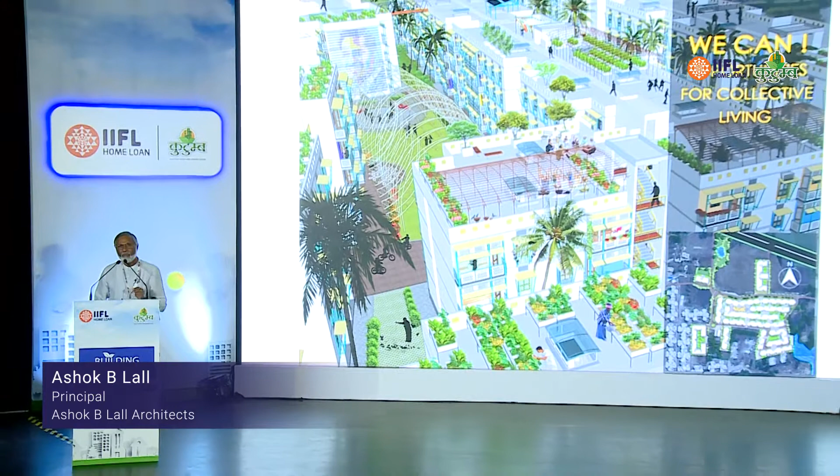So this journey is about the opportunities of collective living, and we're going to look at that and see how, as participants in this work, we all have a role to play towards making a comprehensively better world for living in. We don't only need the basic needs to be fulfilled when we build our homes or when we go to live in a new home. The basic needs being health and sanitation and safety. And of course, the assurances of what I call environmental requirements: water conservation, energy efficiency, and greenery around you.

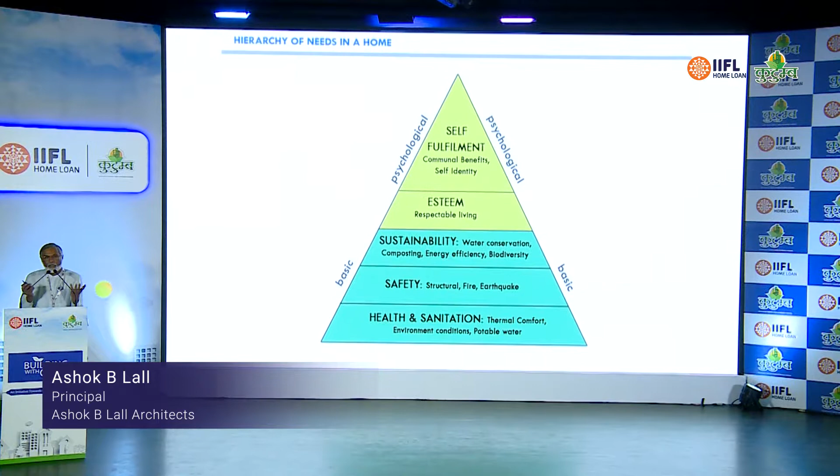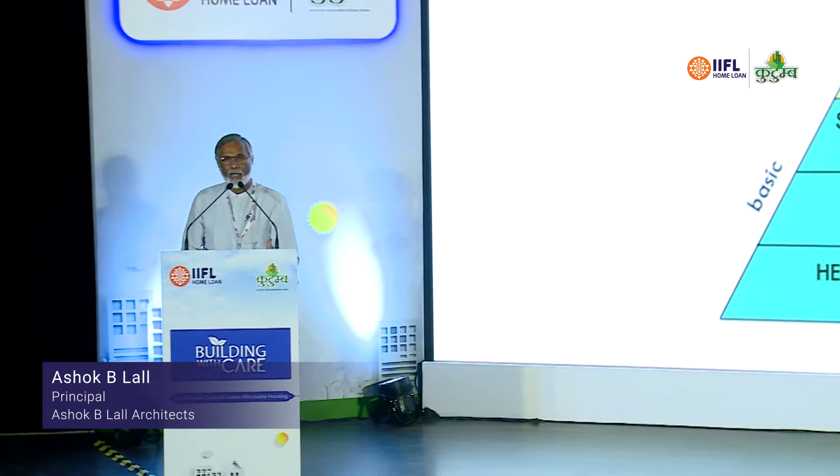This environmental security is an essential need. If in the process of building we don't provide environmental security, then we are compromising our future. And this is a basic need. But we need something more than that. We need, through the process of building and living a new life, a growing self-esteem and eventually self-fulfillment for all members of society. And let us say that providing sound homes for living in is this journey, making this a possibility. And making it a possibility at an affordable price today is our challenge. This is the work that we are really engaged in.

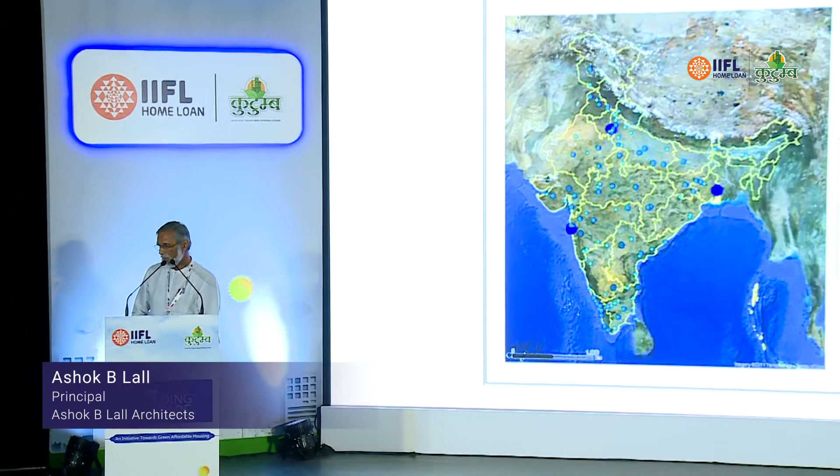Well, we had a glimpse of it in Mona's presentation just now. At the rate we are building in this part of the world, or in China, or in Nigeria, at the rate populations are growing and the rate we are building in cities, we as a nation are going to be a significant contributor to climate change, which is already on its way. So we cannot run away from this responsibility. And most of this is happening in our cities, dotted across the entire subcontinent, as you can see here. And these cities continue to grow. They become bigger and bigger. And the bigger they become, the greater the environmental footprint human habitation is going to have.

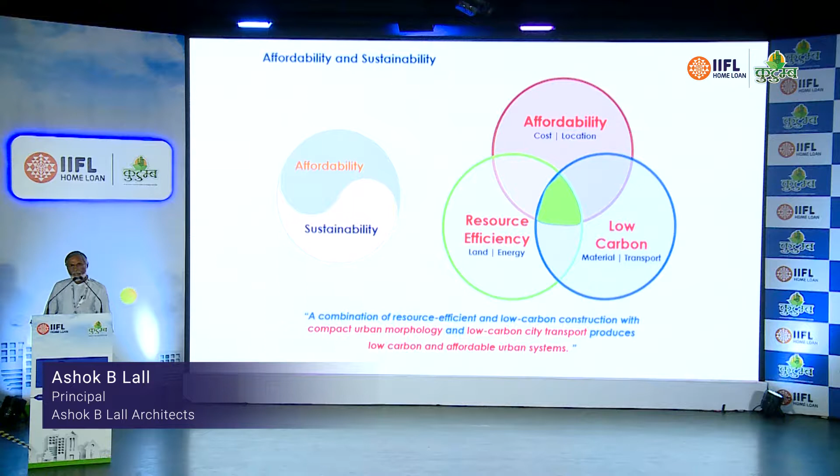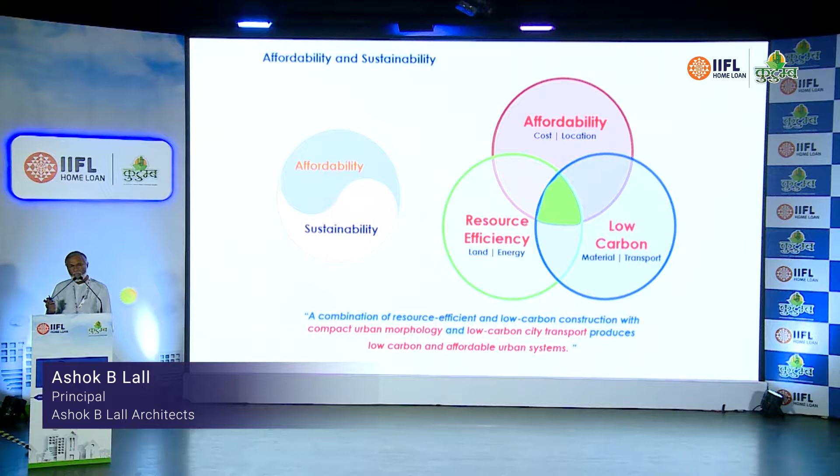I believe that to be affordable is only possible when you are sustainable. And if you are sustainable, you are likely moving towards affordability. I hope this will become clear as we move on. Not only do we have to be efficient in the use of our resources, material resources and financial resources, not only do we have to produce buildings in a manner that produces less carbon emissions, either in their construction or in their operation, we also have to make sure that all of this is done at a price that our buyer with incomes less than 40,000 rupees a month can afford to pay. The green triangle in the middle is the zone of solutions. Just keep this diagram in mind.

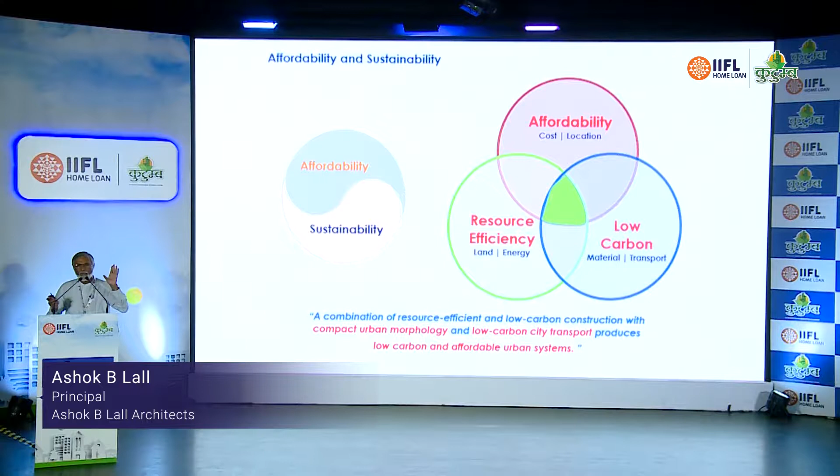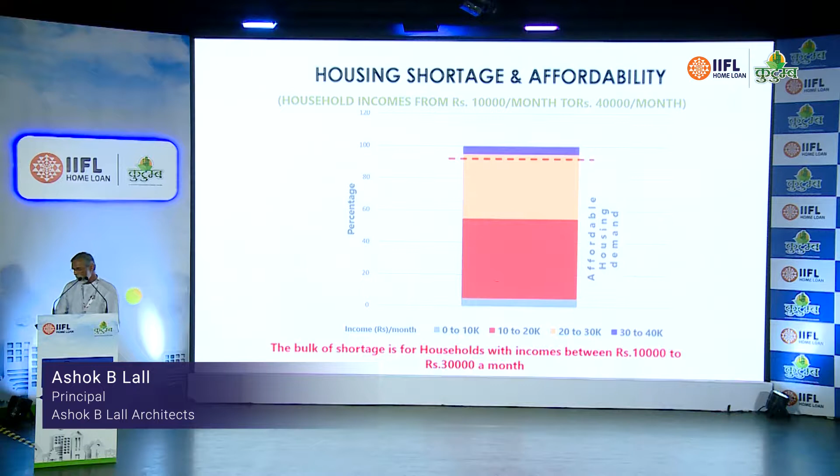Statistics have now made it very clear that most of the housing demand is in the low income sector. Most of it. The bulk of shortage is for households with incomes between 10 and 30,000 rupees a month. And if you scan the landscape of who's providing homes for whom, you'll find that the big developer is not providing homes for this category, not at the moment. Self-build is also not going to do enough for it in the cities. It is the medium and small developer in all the second, third and fourth tier cities, including the peripheries of the large cities, that is going to play the central role in overcoming this challenge. You are in the center of the growth of the nation. That's the point I really want to make.

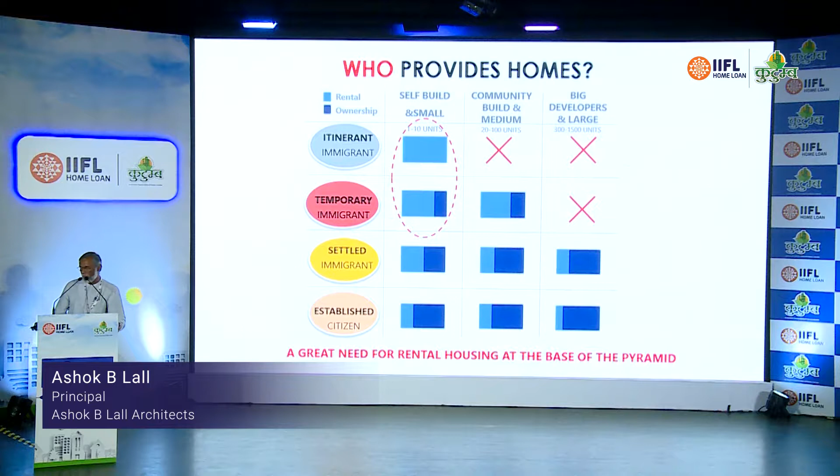Something else that's happening in cities, and it's a subject for Mr. Suresh since he's over here. They say land is short, and so you have to go taller and taller. But we all know, it's common sense. As you build taller, you spend more.

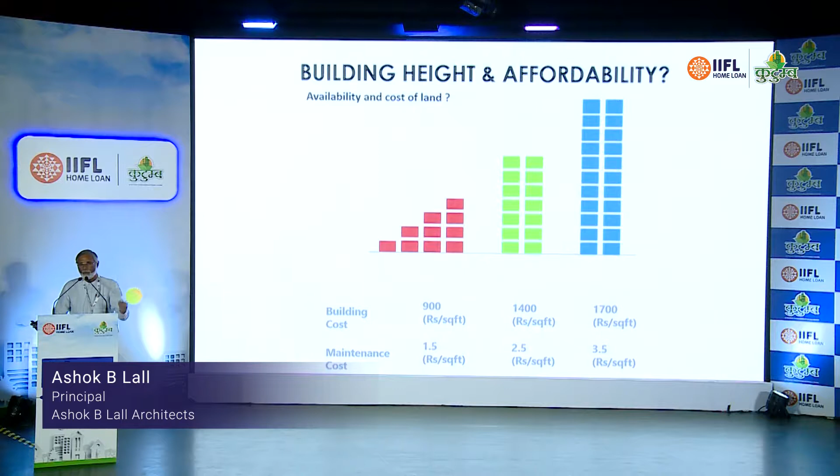As you live taller, you spend more for living. Your prices, your costs for maintenance of the building and the operation of buildings go up. Lifts, pumps, maintenance, so on and so forth, just become more expensive. So actually, not only is a tall building unaffordable to build, it is unaffordable to live in.

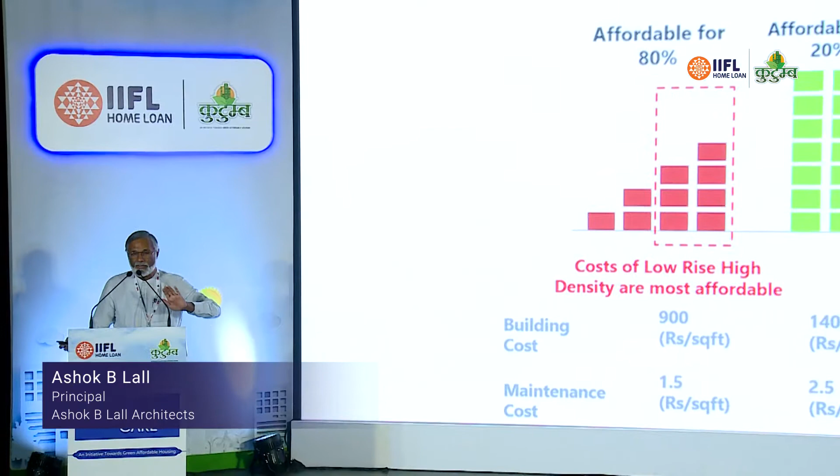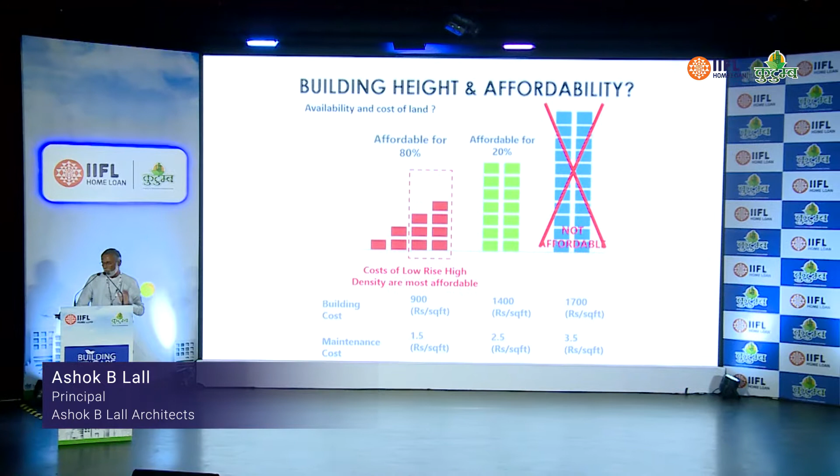And this is something that we have to really convey to our planners and our policymakers. Don't push the cities into a state where only tall buildings are possible, because if you do that, 80% of the population will not be able to afford to live in the cities, and that's no way of living. Most affordable is 3, 4, 5 stories high, and 80% of our citizens can afford it.

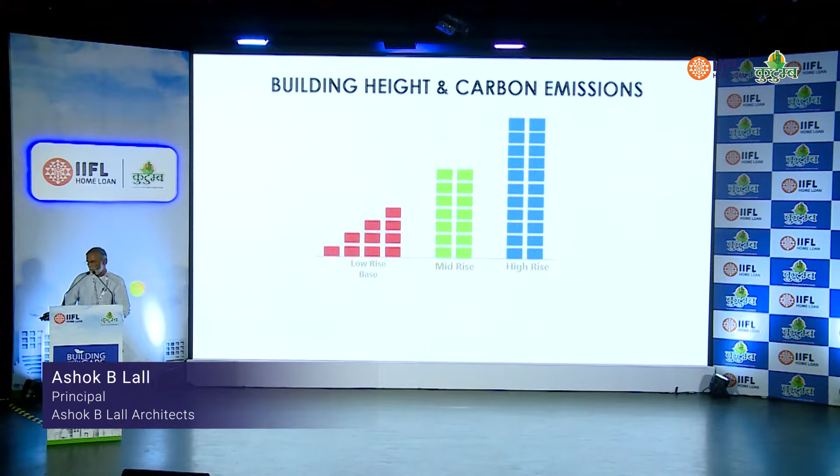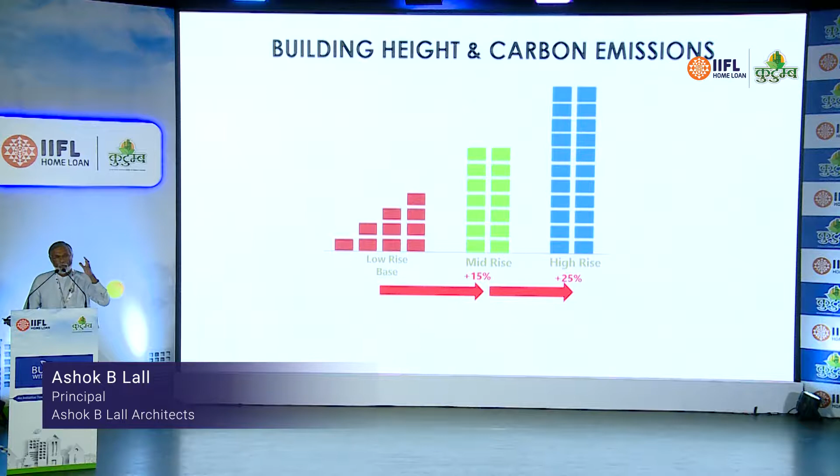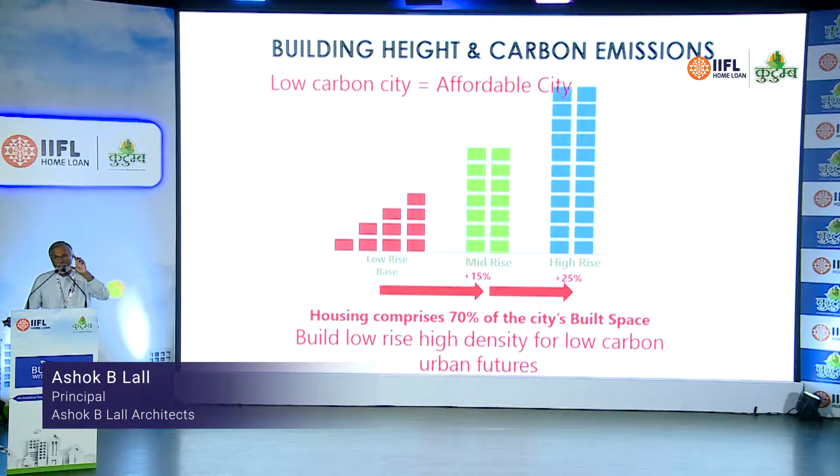We also find that as you build taller, you consume more electricity in the operation of the buildings. As you grow taller, you consume much more steel in the construction of the buildings and other materials that cause a greater emission. They have greater embodied energy and therefore cause much greater emissions of carbon. So, to build low is economical, not only in money terms. To build low is also more environmentally friendly. Sustainable is economical. Sustainable is affordable.

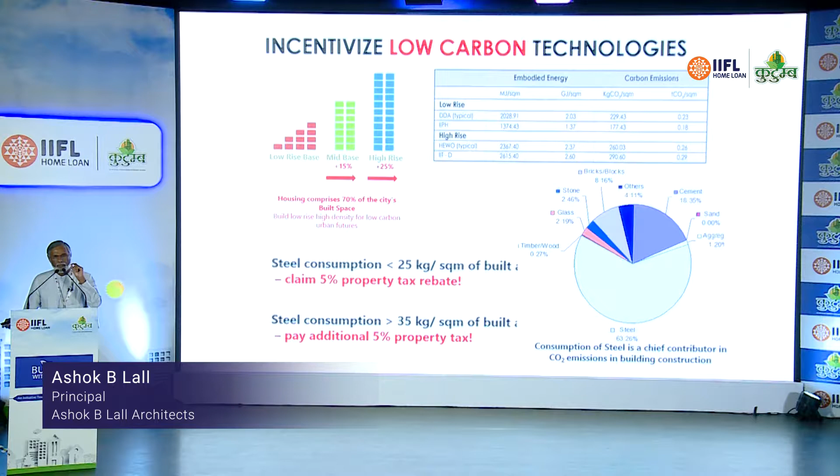We found that approximately 60% of the embodied energy of construction, that is, the energy used in the production of materials for the construction of a building, 50 to 60% is attributable to the consumption of steel in the building.

What we have found, even if you are designing for earthquake zone 3, up to 4 or 5 stories high, you can manage at 25 kilograms of steel per square meter of built space. 25 kilograms, if you do careful design. But what is the norm in industry? 3.5 kg per square foot, they say. If you go taller, it becomes 4. If you go taller still, it becomes 5.

But keep this target in mind. Intelligent structural design and configuration of a building can do much less harm to the environment because you can design it with less steel. 4 to 5 stories high gives you the best results. So that's about embodied energy, very quickly.

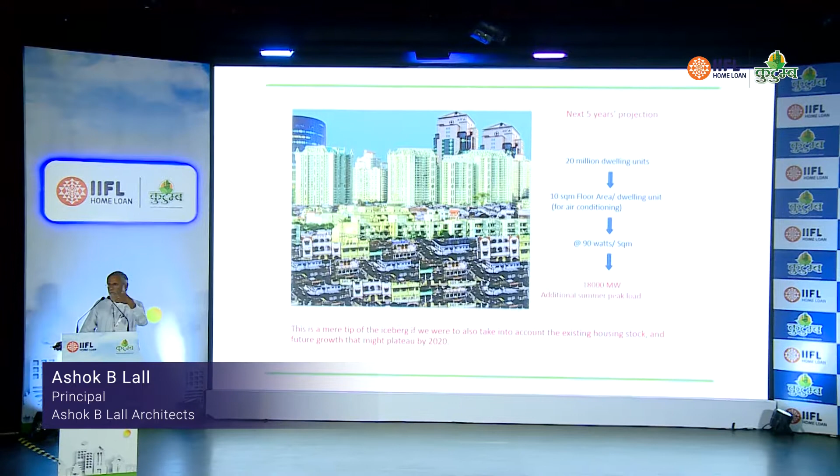Another thing, as we go into looking for better comfort in the home, even if I'm moving into a home today which has no air conditioning, 2 or 3 years down the line, at least one room is going to be air conditioned. Maybe it won't be used all the time, but sometimes it will be used. And then 10 years down the line, maybe more air conditioning will be required. At least I look for air conditioned comfort, if not for air conditioning, right?

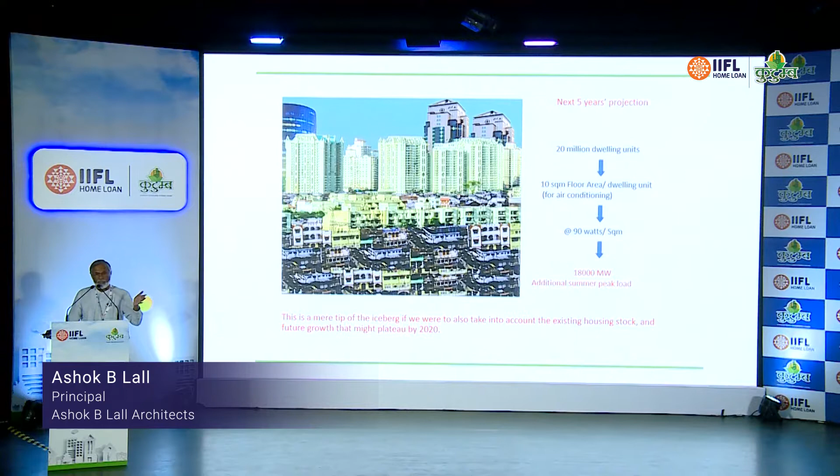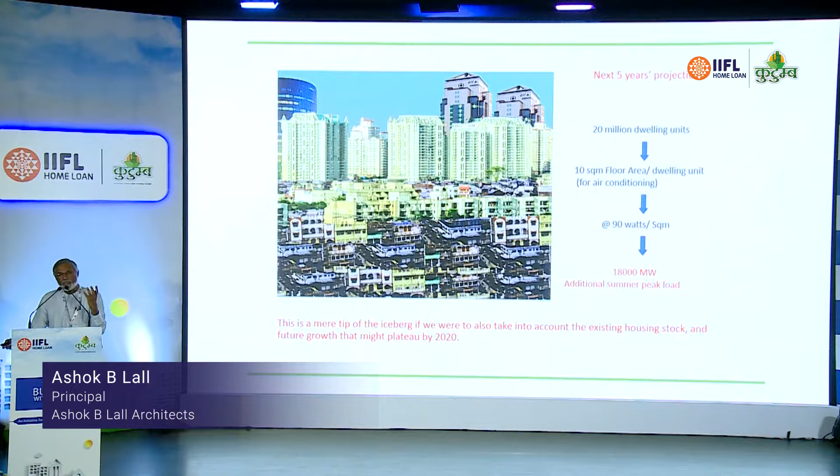So what do we have to do today? Even if air conditioning is not going to be assumed to be a part of the building, we have to design in such a way that the need for air conditioning in the future is reduced. Because if you don't do that, and as you continue to build at such an enormous rate, you'll find that you're going to ask for so much energy just to meet the air conditioning demand of our urban living.

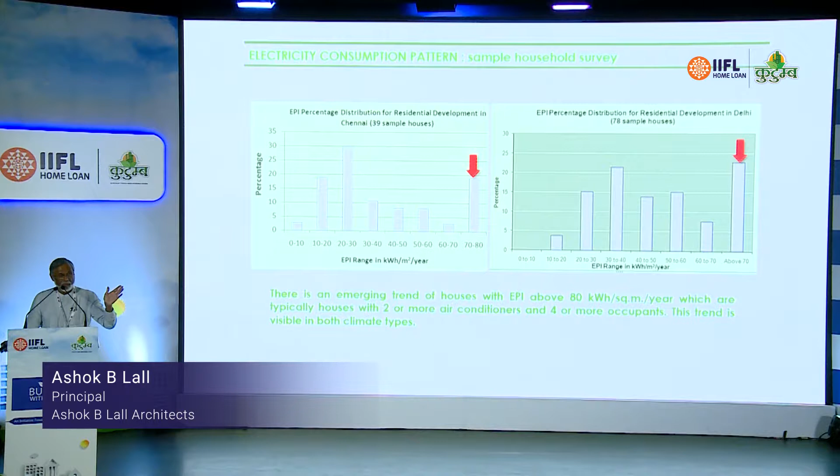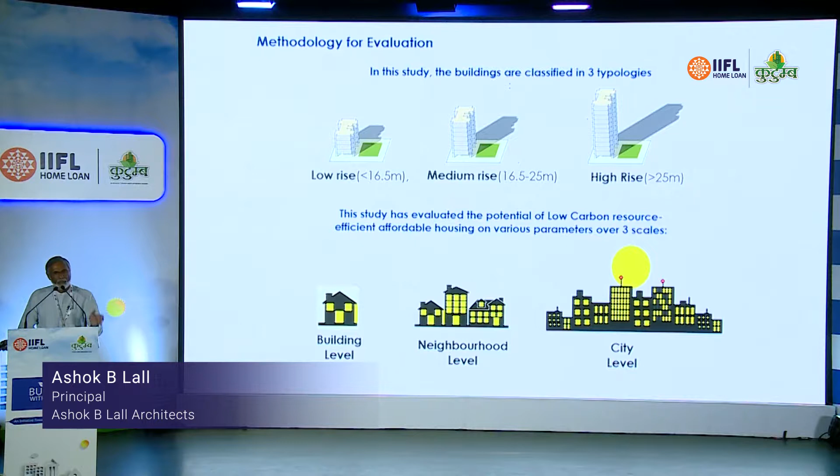So we did this survey to establish that in middle class homes, progressively 60% of the electricity bill is attributable to air conditioning itself. 60% of it, in any part of the country. We did a comprehensive study of 4 to 5 story high housing, 8 story high housing, and then taller housing, with actual data taken from buildings that have been built. And we came to this interesting conclusion.

We found that in the overall development, if you consider the terraces and the balconies as also accessible open space for the residents, you get more open space per person in affordable housing if you are 4 to 5 stories high, and you get less as you go taller, and even less as you go taller still. So open space provision, which is an integral part of the home environment, actually improves even when you achieve the same densities.

Embodied energy of 4-story housing is 30% lower than 8-story housing. Operational energy is much lower still. It is about 20% of a tall building. An incredible possibility is that if you build 4 stories high, you've cleared the roof line, just at the tree line. That entire roof is now available for solar photovoltaics.

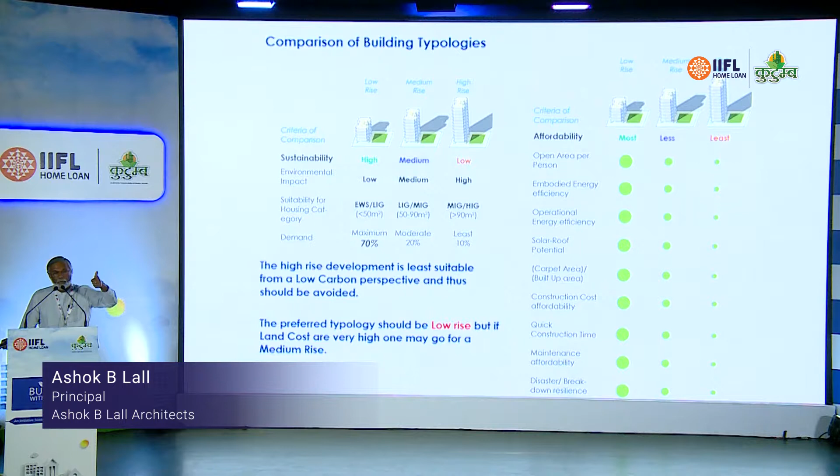As the government program, the technology, the financing structures and business models for solar photovoltaics become more and more accessible, we have found that 85% of the energy demand of simple living in 4 stories is met by the sun falling on the roof on an annual basis. You can truly go towards net zero city life if you stick to 4 to 5 stories high. If you go 8 stories high, that potential drops. If you go 12 stories high, it will never be achieved. So if you're talking about cities of the future that are free of carbonaceous fuels, this is where the solution lies.

Simple things about which way the houses should face. Don't face them directly into the sun. Don't face them directly into east and directly into west as much as possible. Keep the heat out.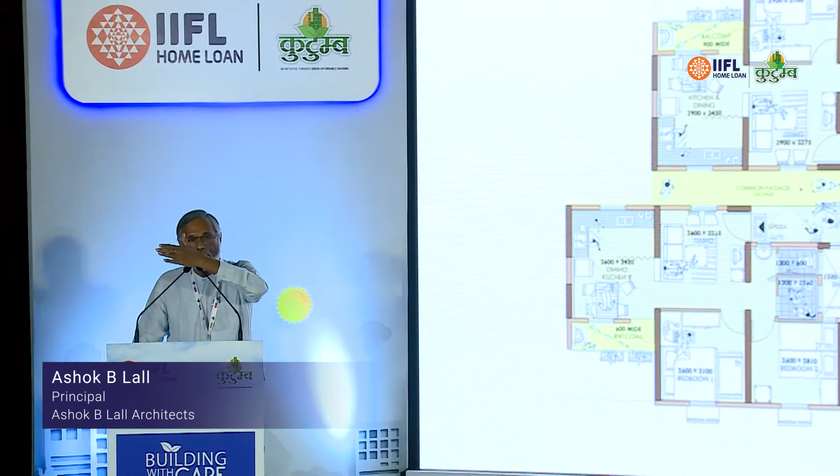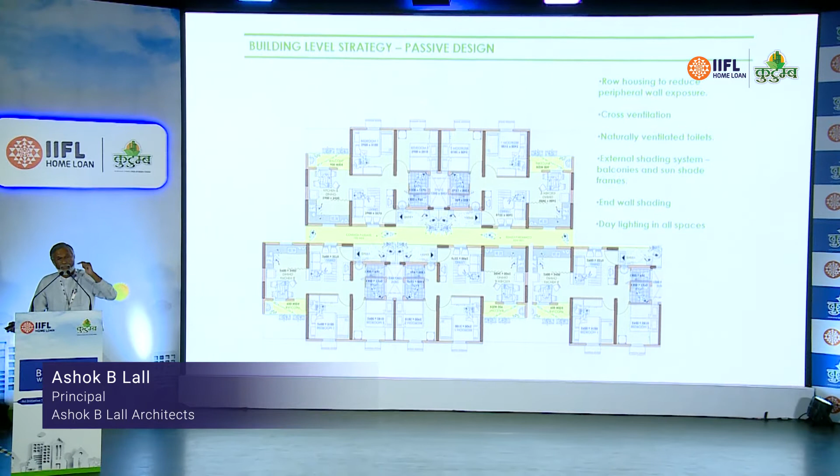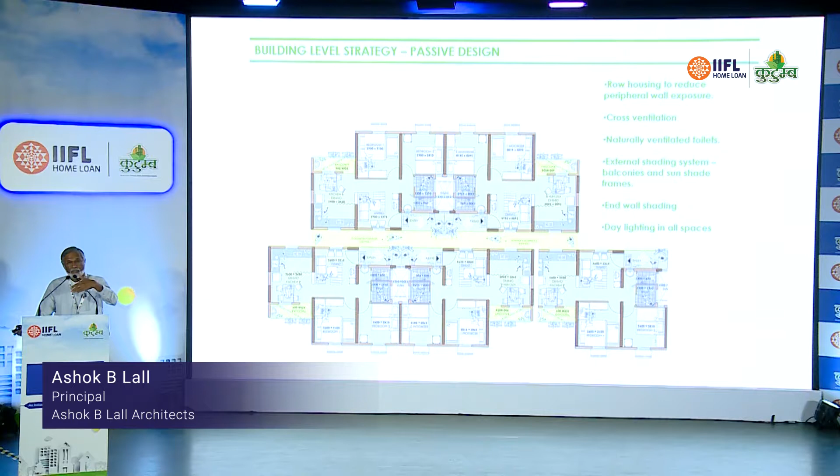Build in such a way that the external wall area of the building is limited in relation to its plan area. Use a row housing principle or similar principles of design. It brings down not only the construction cost, it brings down the area of the walling on the external face, external finishing, right? Doors and windows, and the exposure of the inside space to the heat or cold of the outside. In every sense, it is more efficient. It is more environment friendly. It is also less expensive.

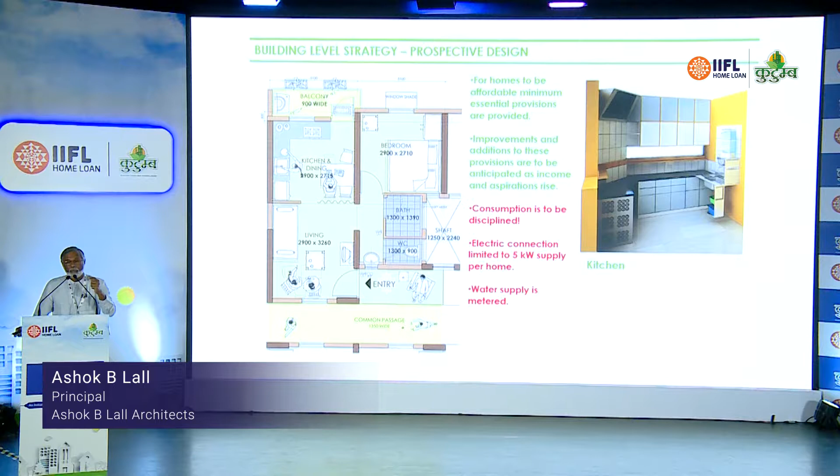And you can design in such a way that what you occupy today can be varied for the needs of the future. Again, very careful structural design can allow you to increase the size of a house by adding the neighboring house to your house, or the neighboring room to your house, or selling out your room to somebody who's a neighbor, etc. Because the structure is going to stay for 50, 60 years. Whereas the internal living spaces are going to undergo change as incomes improve, family structures change. Make the buildings future-proof, and this can be done at low cost.

Extremely important. Do provide for external shading. Stop the sun outside the window. Don't let it come in. If you're going to let it come in, it's going to heat up the house. Simple ways that you see. On the right-hand side, you see a very interesting solution.

If you go into the countryside, go into the old cities, the old days, you used to make windows out of solid shutters. And when glass came in, a little bit of glass came in at the top. When it is pleasant outside, you simply open the window, let in the air, let in the light. When it is very hot outside, you don't even want the sunlight, and there's enough sunlight outside when it is very hot for a little bit of glass to do the job. So a simple way of shading and keeping the heat out.

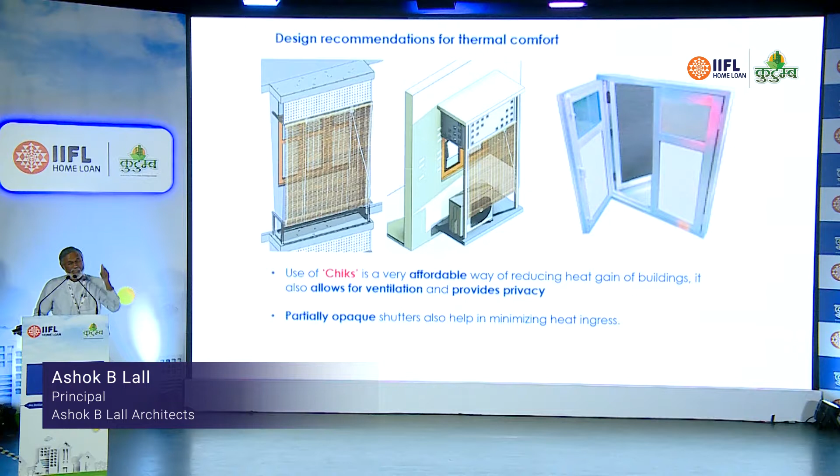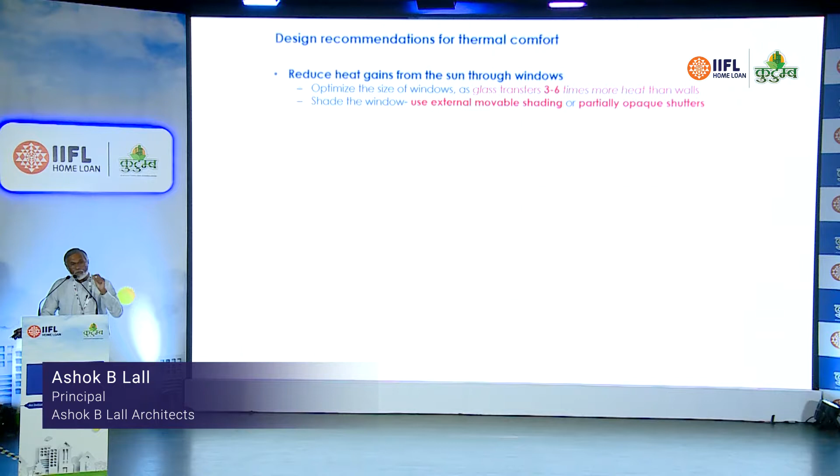But if you want more view and more contact with the outside for space or whatever else you might want, do provide an external shading system. Goes to balconies, and to every other element which is open to the outside. So, very important, to reduce the demand of air conditioning in the future, reduce heat gains from the sun through windows.

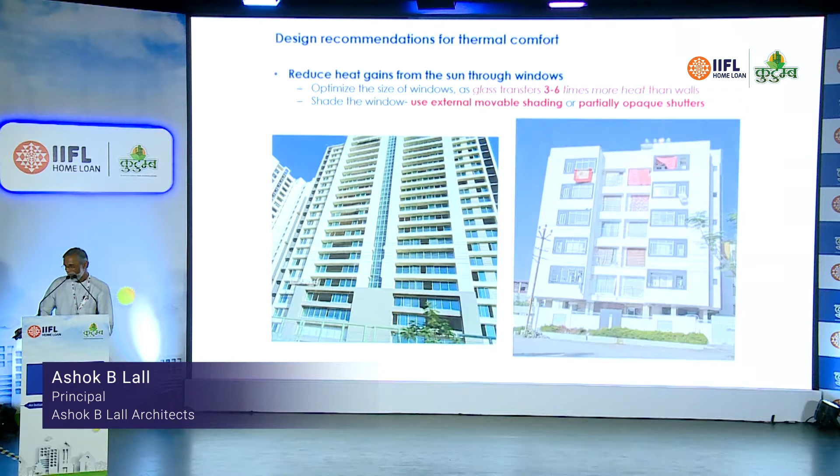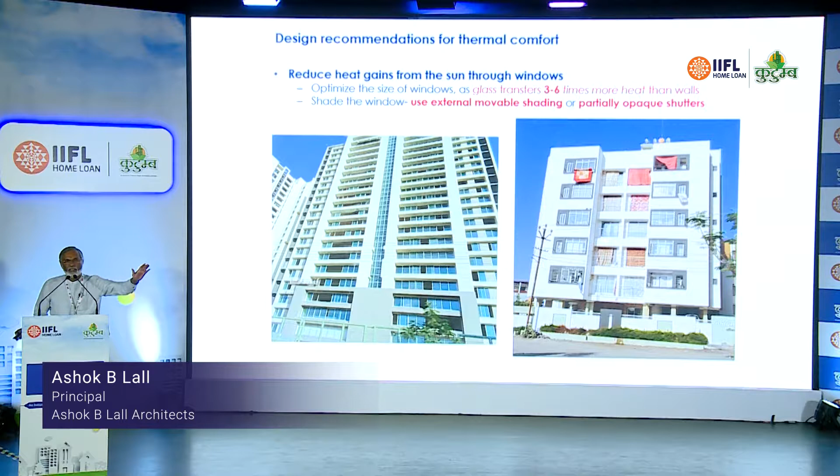Don't do this. Don't think you are up with the fashion. Just don't do it. Because this is what the occupant ends up doing, covering the window with a piece of cloth outside because you got it wrong in design. Okay? I think in Bangalore, this is the worst fashion trend that I have seen. Increasing glass just to make life uncomfortable. I don't see why people do it.

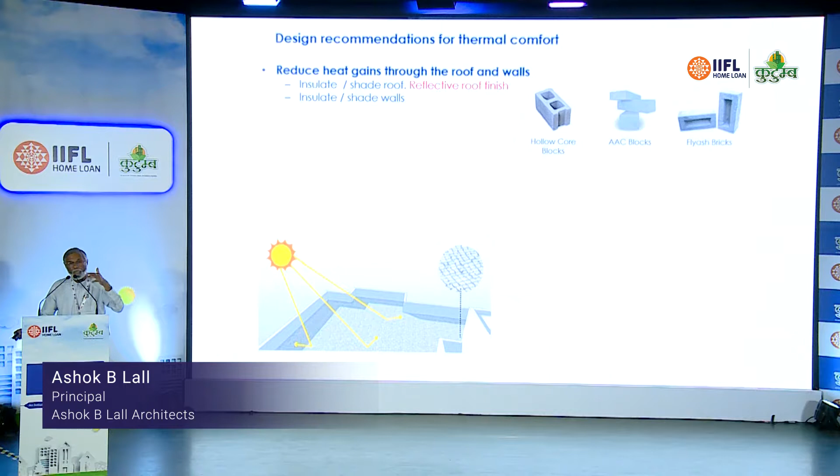Now you can have walling materials that give you better insulation. These are all available. They cost you perhaps 5% more than old traditional materials, but they give you much better environmental results. And they are lighter than the traditional materials. So instead of solid concrete block or solid brick, if you have hollow block or lightweight concrete block, you get the compensatory gain in the design of the structure because the structure has to be lighter.

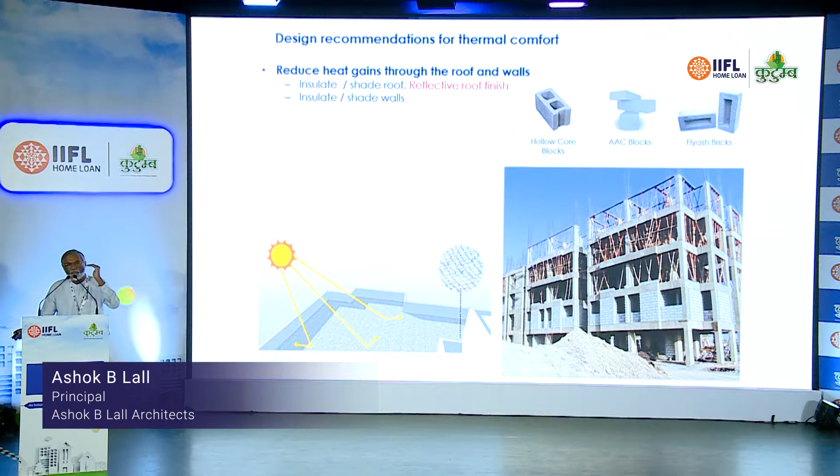Insulate the roof. Roof insulation is an absolute must, and it doesn't add more than 0.5% to the overall cost of building. But what it means is that you can sell the top floor in the city of Jodhpur, not talking about Bangalore because here the climate is not so bad, but any hot climate, you can sell the top floor at the same price as you can sell the middle floor, because people have got to know that the top floor is the hottest floor. Insulate the roof. Insulate the walls.

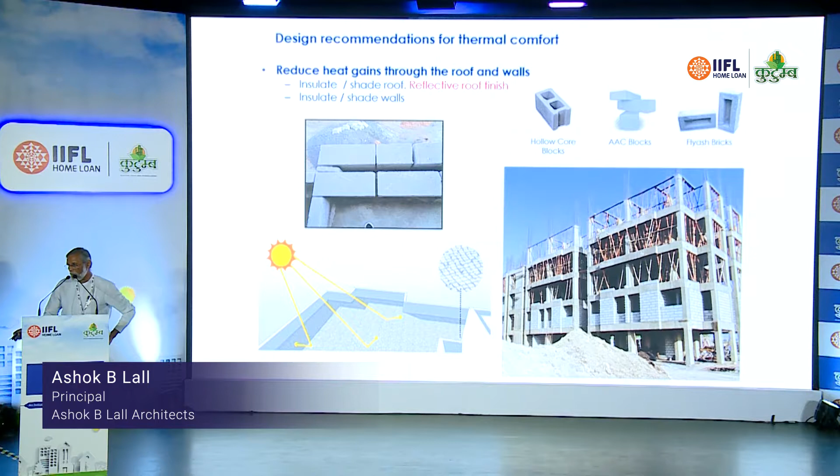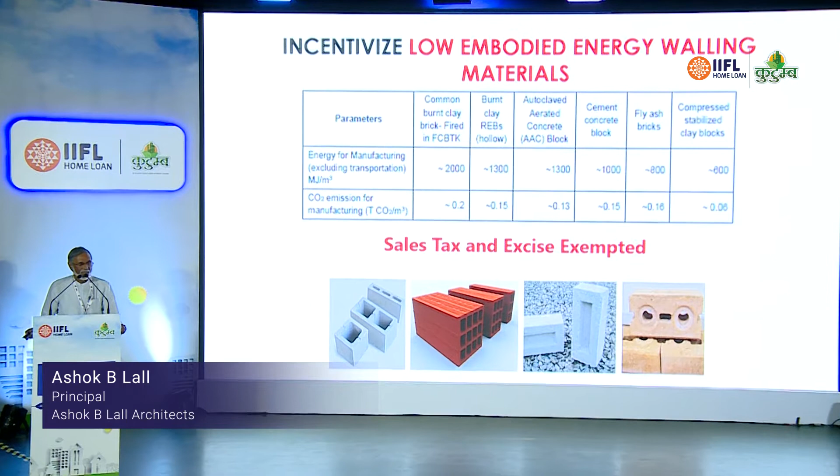Here's for policymakers. Remove GST on these materials, sir. Okay? Make it affordable. Make environmental design affordable. Isn't that what our job is as government? Total profitability, comprehensive profitability, not only GST counting the exchequer. No. I think we've got to really move policy in that direction.

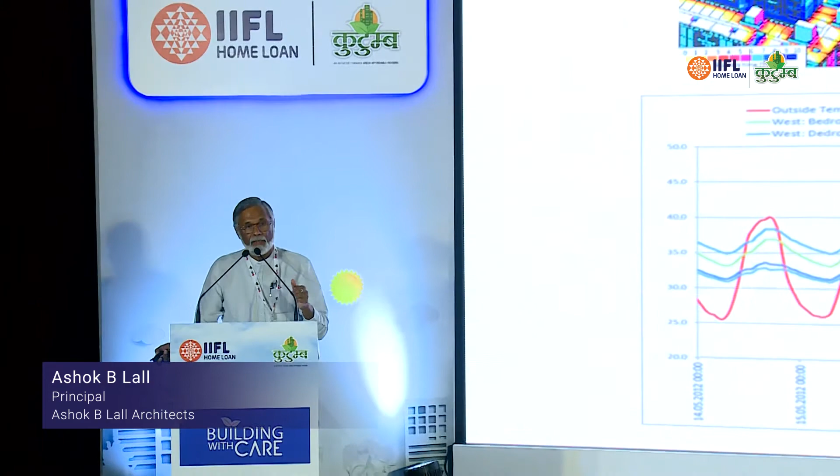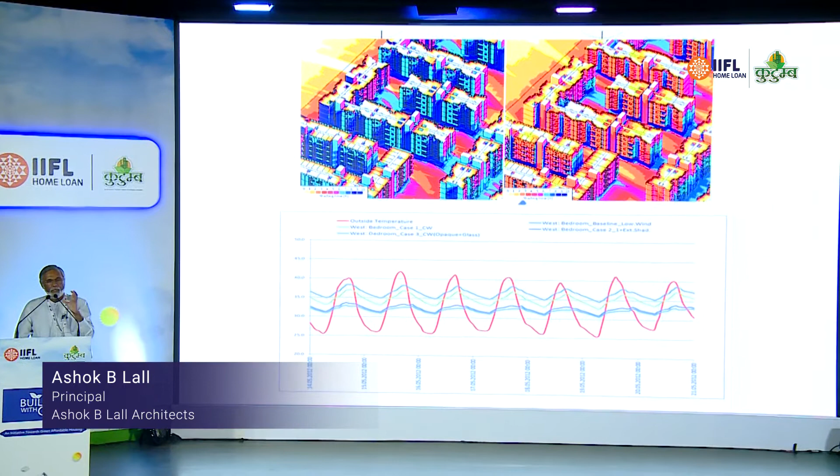We have done intensive simulations on the thermal performance of buildings that can be achieved by what we call passive design. No air conditioning, only orientation, shading, some insulation on the walls, reducing the size of windows, insulation of the roof, 4 or 5 things, and being able to open the windows sufficiently for night ventilation to cool the building down.

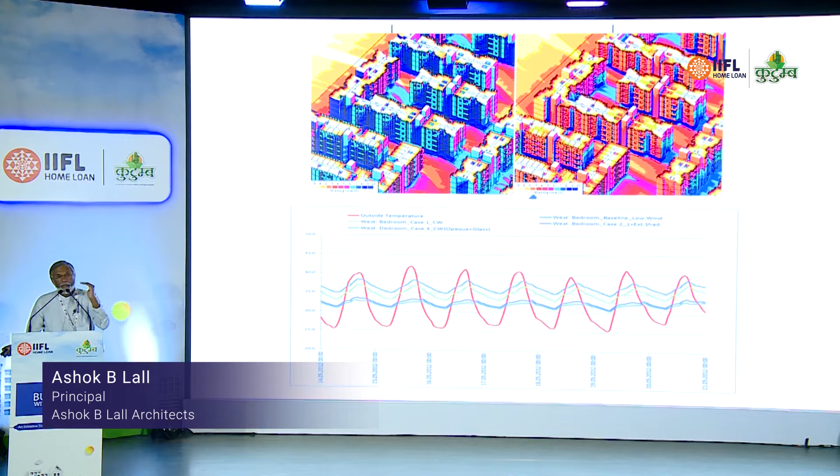And we have found that we can get 80% of the time in most climates across the country comfort without any need or demand for air conditioning. And all of this is achieved with practically no increase in the cost of construction. No increase.

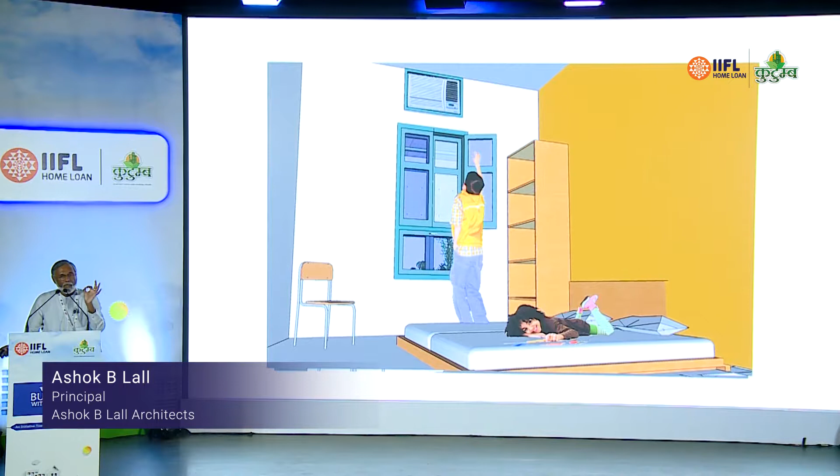So here it is. Today I don't have an air conditioner. Tomorrow I have an air conditioner. But what we worked out was a 0.75 ton air conditioner, window unit installed in the upper level with a ceiling fan that runs slowly is all that you need in a room, in a common bedroom.

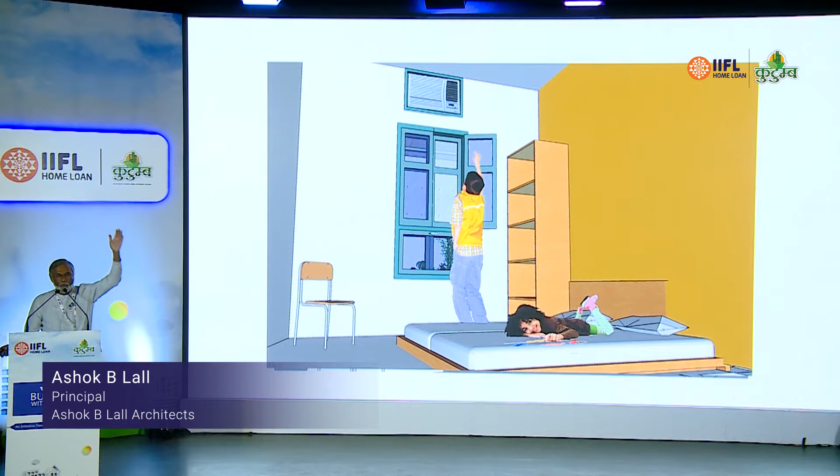The industry is selling you 1.5 tons minimum. All right? And it's less efficient because of the distance between the outdoor unit and the indoor unit. But this is all that you need in the worst climates. Well, 3 major goals. I won't go into the details except to touch upon the maintenance and regulation of services infrastructure.

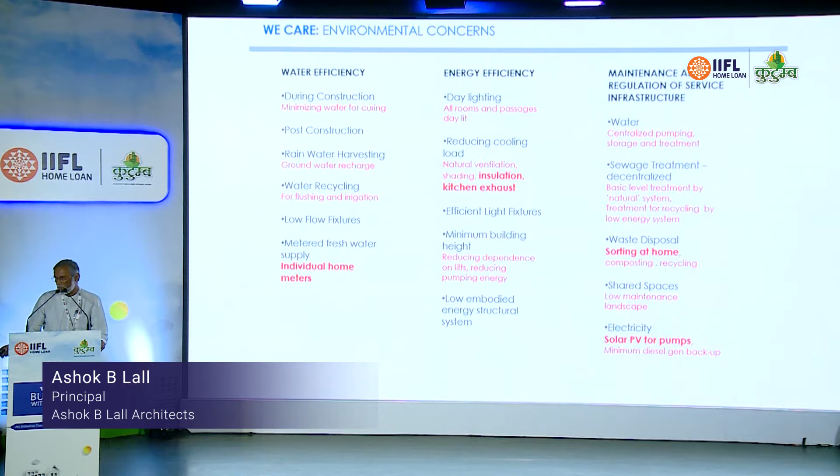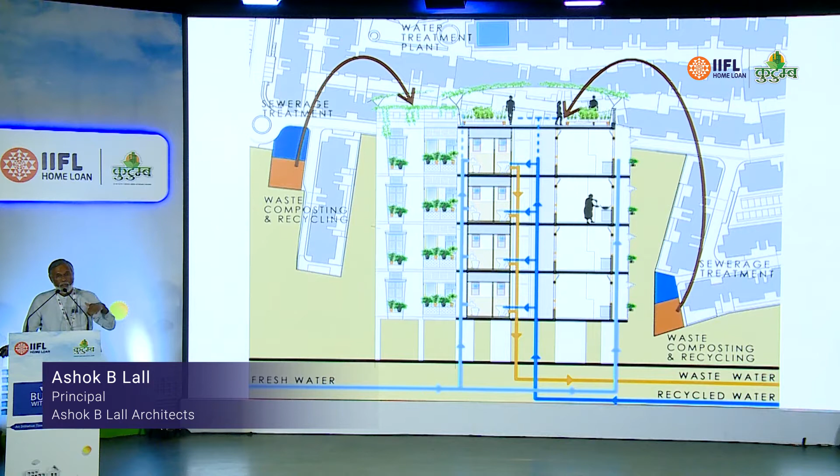What we found is that once you have about 200 homes, collecting the waste, treating it on site, recycling the water for flushing and irrigation becomes affordable. 200 homes. At that unit, these technologies are now available, they're affordable, and they're very reliable technologies. That's already been done. For very large projects, environmental controls require you to do that. But for smaller projects, it is still doable, and then you qualify for the green rating on which the financing is dependent. But it's doable.

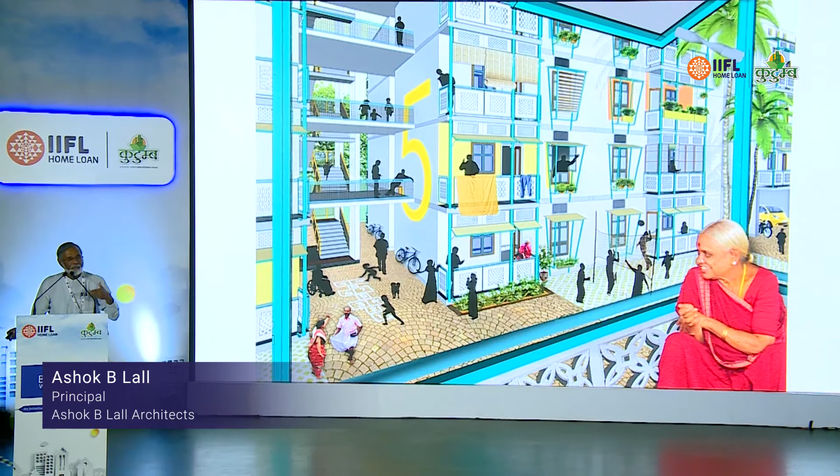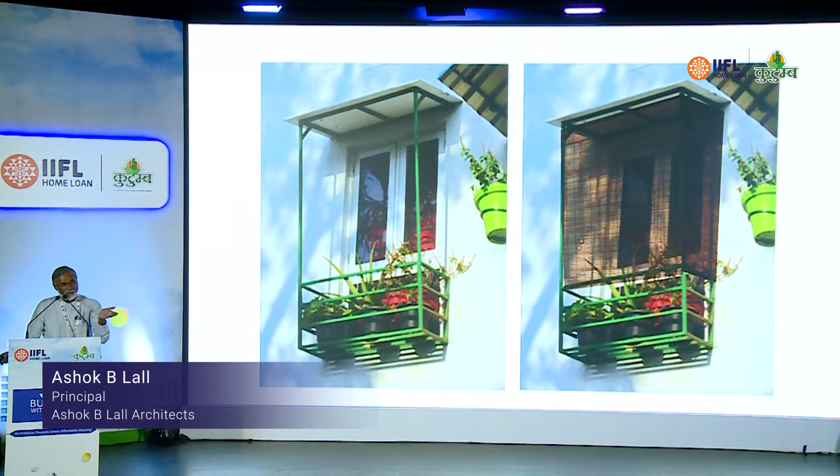Things will never be constant for all times. They will keep changing over time. Buildings must be designed to accept change, to accept gradual improvement as people's lives evolve. Here's something that's been built. See the shading frames outside? We haven't provided the shading yet, but people do it. It's very easy to do. Here you are.

And it's about the benefits of community living. The infrastructure that is possible, the economy that is possible, the water supply, reliable water supply, treatment of waste, reliable electricity supply, all that is possible only because you're taking the advantages of community living. You're sharing the cost of your infrastructure together, which you cannot do if you build independent homes. And that's the possibility that we are looking forward to.

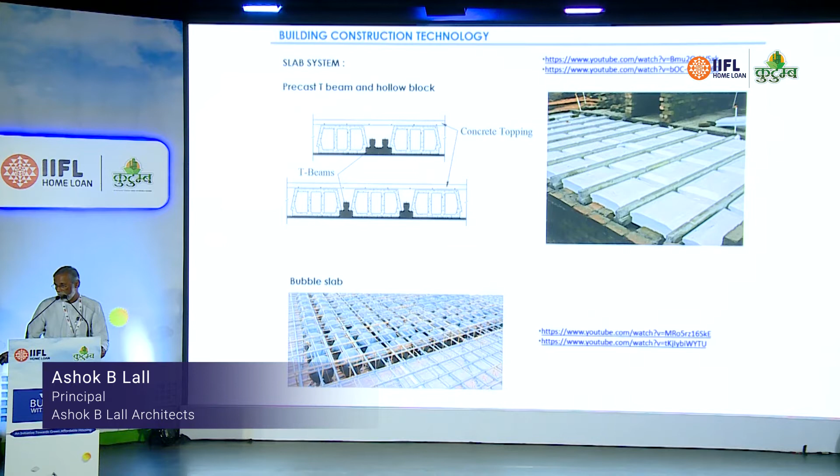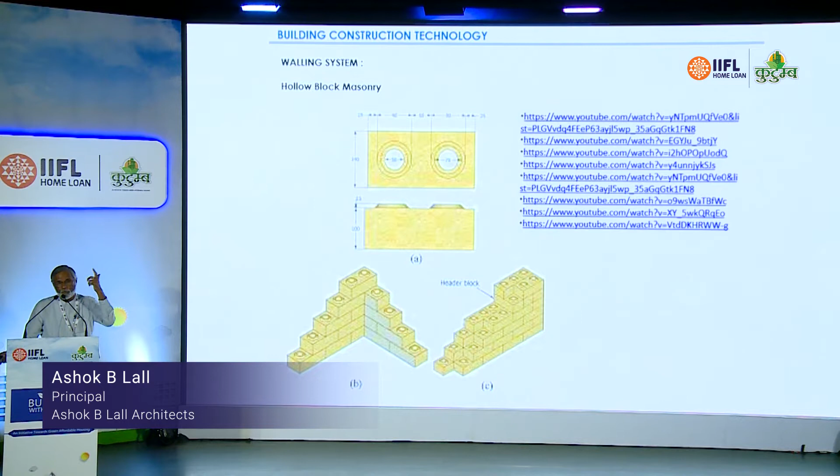Many ways of building very economically. New technology on the block. Interlocking hollow block, which can be assembled very quickly. You can lay one floor every week. Minimum reinforcement for 4-story high, 1.9 kg of steel per square foot.

Again, for our policymakers, if you look at planning regulations, there's an awful lot of land wasted because of the reservations required by planning regulations, which are not required actually for living. And because of that, you're not able to achieve the densities. And if you're not able to achieve the densities with 30% ground coverage, you end up having to build taller, and then you're out of the range of affordability. Rethink that. You can make more affordable homes at lower heights, at higher densities.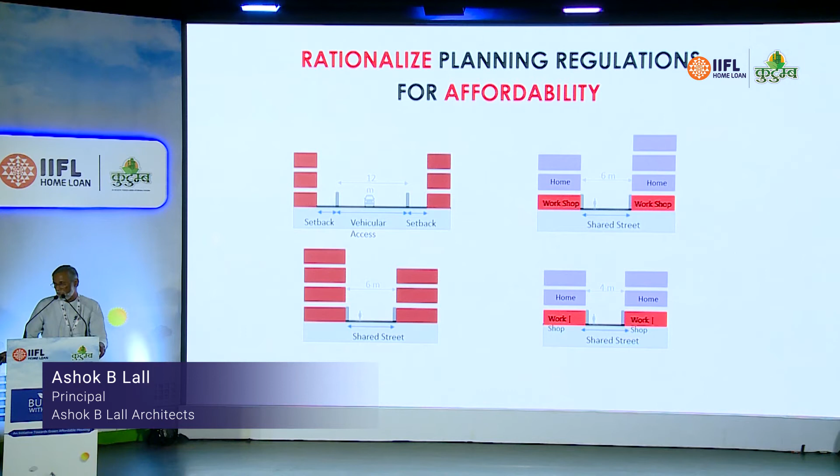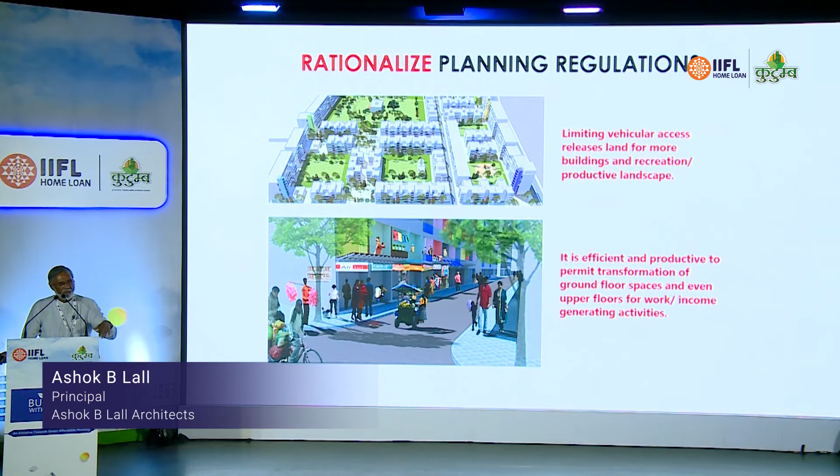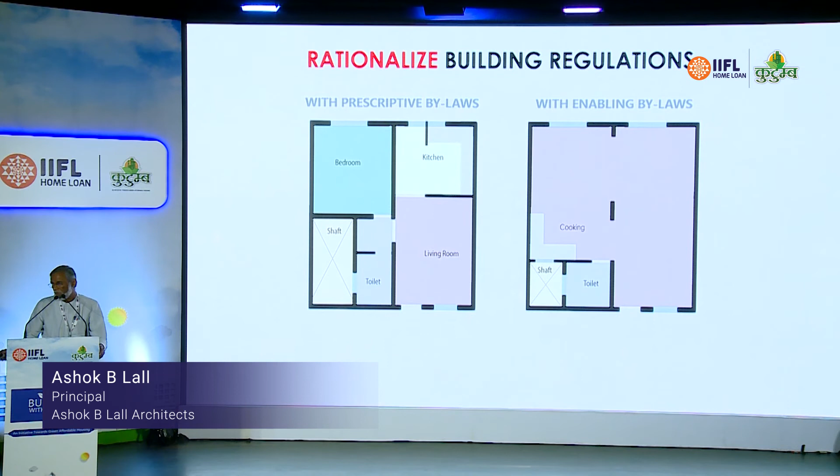Mixed land use is another such question. Allow people to open shops on the ground floor if it's convenient for them, so long as they don't mess up the space. Have some rules about that, but don't have any segregation of shopping from residences. Internal spaces, my God, those rules are the most insane. They don't leave the occupant any freedom to do whatever they like. They don't allow the builder to give freedom to the occupant. Why not? This is something that needs to be rationalized.

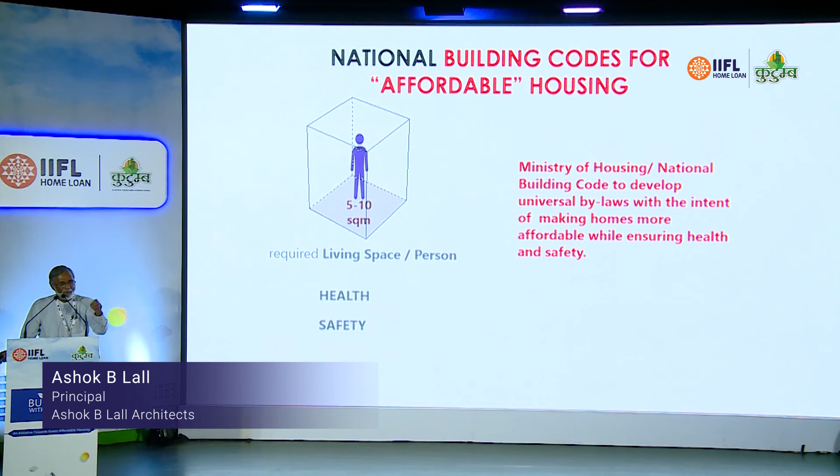And I think, Suresh sir, you're on to this task. I look forward to some results. This helps all of us. It helps all of us. Thank you very much.